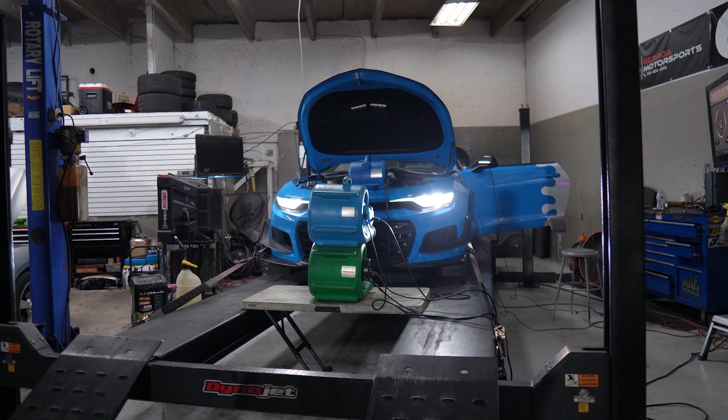Today we're going to be throwing in an aftermarket air filter to see if it actually increases horsepower. I'm getting retuned with a smaller pulley and E85, but before we do the dyno hits with that, I'll ask my tuner to do one dyno hit with just this changed out, to see if the aftermarket air filter actually increases horsepower. This vlog is going to include the entire dyno day, because I can't make a whole vlog about changing out my air filter.

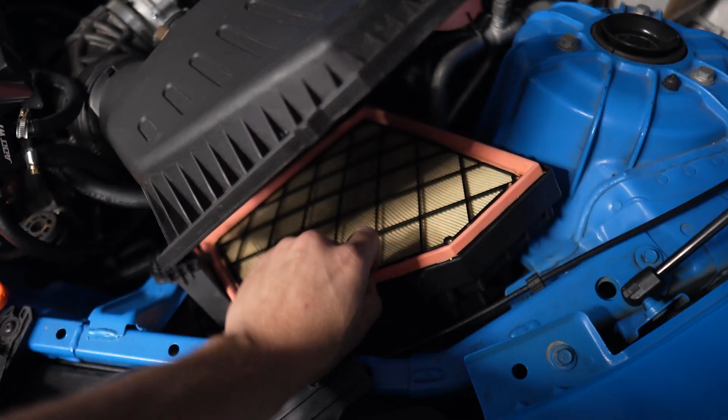Installing this air filter is going to be pretty straightforward. It's just a bunch of screws on the outside box, and the filter should be on the inside. I don't think I have to uninstall anything, so it's pretty easy. Alright, last screw here, then this should be able to just be yanked out. It's not dirty at all - this car is pretty much brand new. It's got 17,000 miles on it, 2022, so I didn't expect this thing to be nasty.

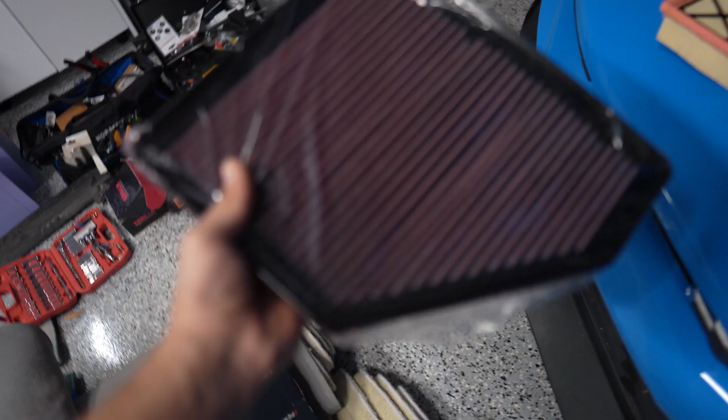So here's your comparison - this is the K&N. I suppose it's high flow because there's bigger area between each of the grates of the filter. I don't know, it could work like that. As you can see, this one is more condensed, not allowing that much air to go through. But we'll see on the dyno. The oil on this thing is actually disgusting, but I just mated it up, put it in exactly how the other one was, and we can close the box once again.

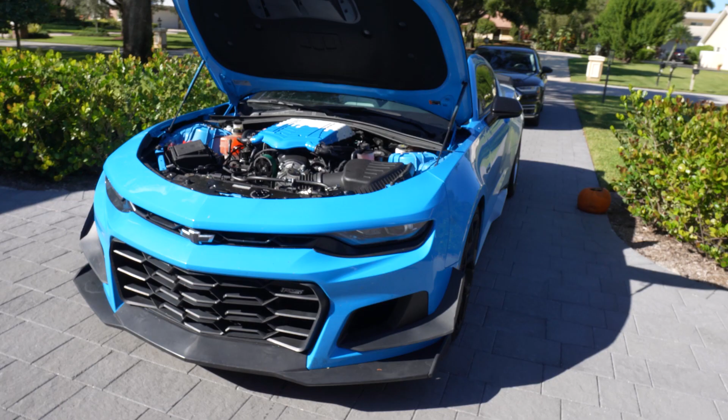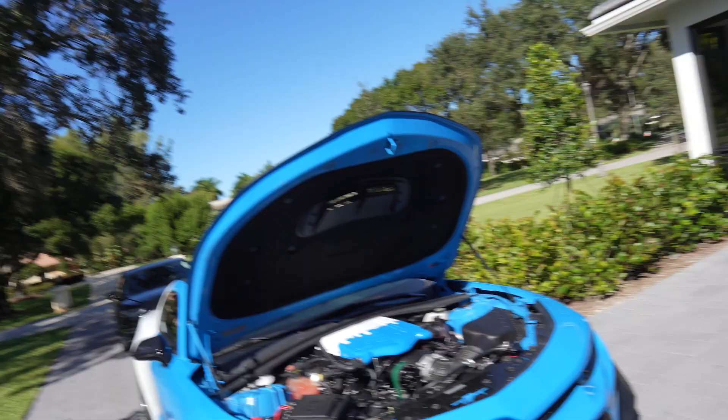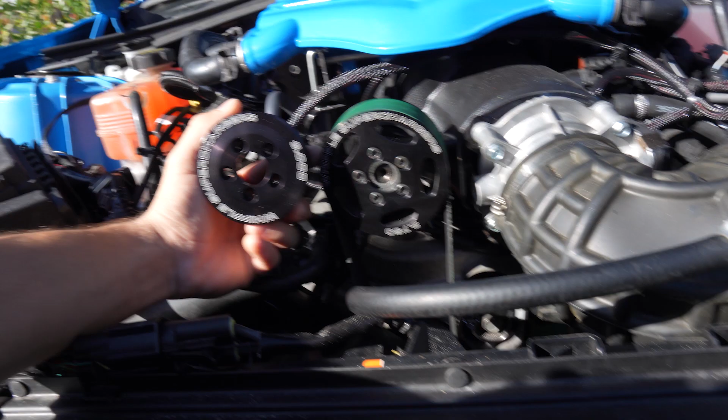Dyno day is tomorrow, so you all know what that means - we need to swap pulleys as soon as possible so I'm ready to make big power. This one right here is for 14 pounds of boost. It's a 3.0 Whipple pulley, and the install is going to be fairly simple. We just have to pop off the intake boot, mess with the belt tensioner. Hopefully I can reuse this belt and get this brand new pulley on, but you can see the size difference right here - this is 7 pounds of boost, and the smaller one is 14 pounds of boost.

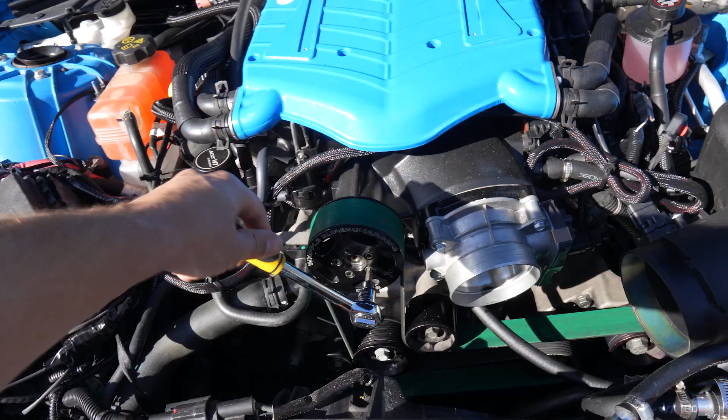This is like the easiest part of the install. Intake boot, just loosen the clamps. While that belt is still on there, we can break all these bolts off the pulley itself. I'm going to make sure not to miss any, because if I take that belt off this top pulley, it's going to be very difficult to break them off.

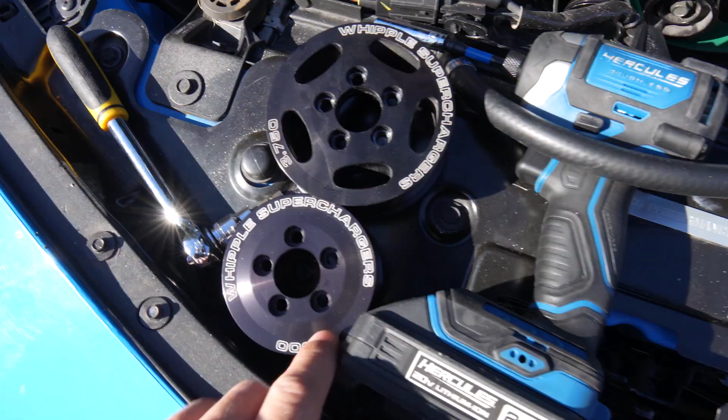So here is my 7-pound stock pulley that comes with the Whipple in the kit, and then here is the 3.0. This one makes 14 pounds, like I said before, but you can really see the size difference between the two. The smaller the pulley, basically the faster the blower spins and the more boost it creates. So that's what we're doing right here to increase boost. Sheesh boys, this thing's about to make some steam.

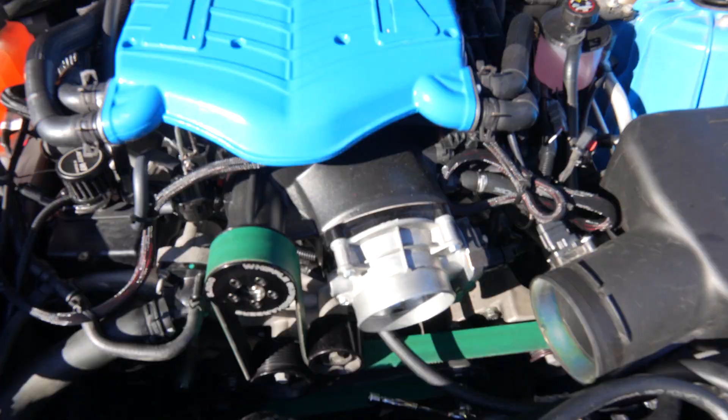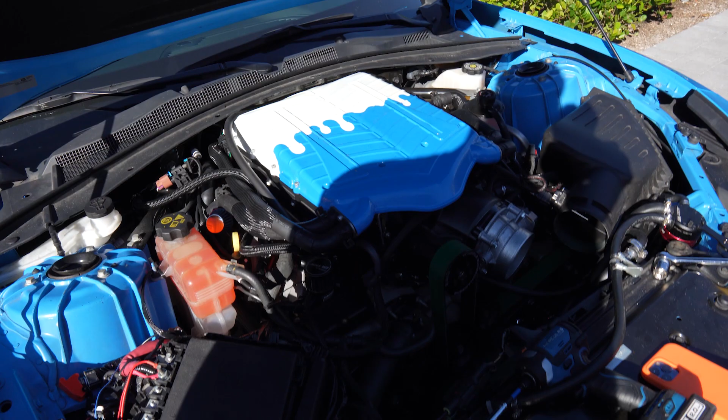I'll torque it down to spec once we have the belt on, because right now the pulley is just spinning freely. I was just messing with the tensioner and slid over the adjustable idler pulley like I showed in the previous YouTube video when I first installed this thing. The belt is a little bit too long, so I'm going to have to go buy a shorter belt. I'm not sure which belt this is, so I'll have to ask my friend with the 3.0 pulley which belt he runs. But this one's definitely too long because it's not tensioning properly - there's too much slack in it.

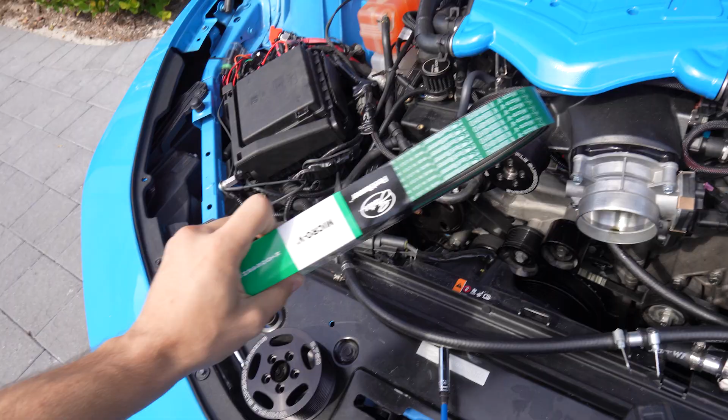The next day - oh, we are a little bit late because the belt didn't come until about 12 o'clock. But let's throw this thing on and get to the dyno so we can finally make big power in Sully. Let's go boys, we've got to get this going because I'm late.

So let's hurry up. I'm just going to do a quick little test start to make sure everything is 100% in order. Looks good to me. If it slips, it slips - we've got to get a smaller belt.

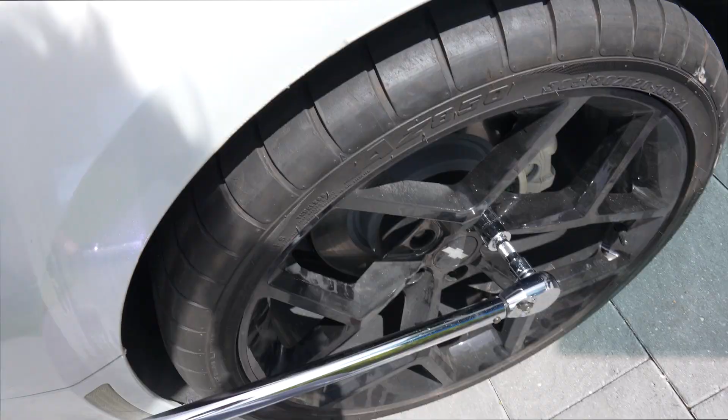I tried, boys, I tried. I already paid for this one. It's kind of crazy how that doesn't even fit. Oh - got it.

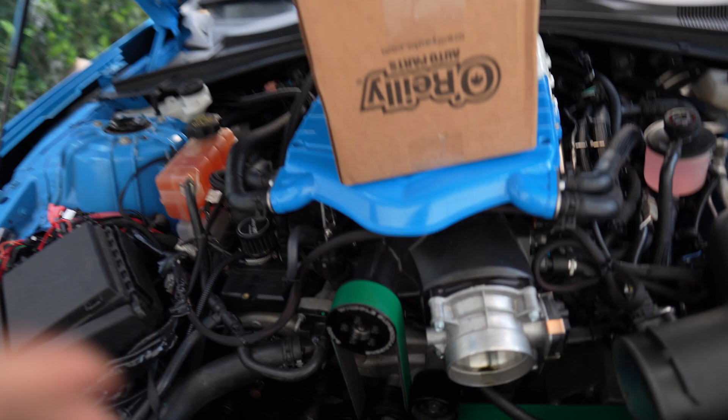I don't believe I ever updated the vlog - I actually didn't end up making the dyno day. The Zesty man is also back, he spawned out of nowhere. But I missed the dyno day because the belt came too late that morning. It was supposed to come at 7 a.m., it showed up at 12 p.m. My dyno appointment was for 11:30, and I had to reschedule.

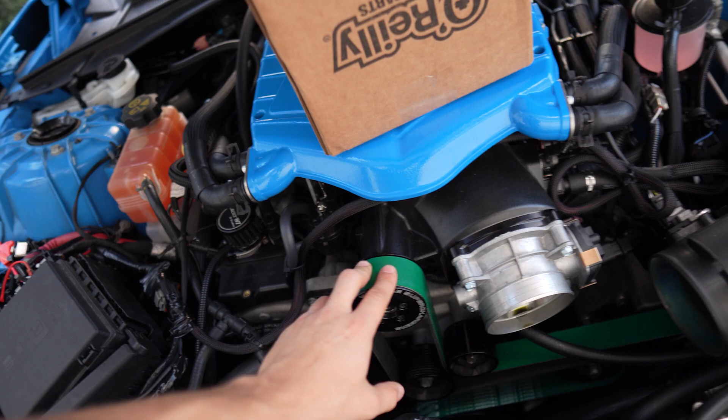And guess what - this belt, although shorter, ended up being too long, so I had to once again buy another belt, and I'm going to the dyno tomorrow.

So we're going to slap on this small belt and get ready for the dyno tomorrow morning. That way I can just pretty much turn the car on, head out there with the Zestiest, and see this car make some nice power.

But Big D, show us the difference between the two. So one is 2 inches shorter - that's the 822, that's the 848. This one is too long for the current pulley, this one is good. Throw it to me, let's get this thing on the car.

3, 2, 1, let's get a test start. Yes sir, we are all good here. Look at that, cha cha cha cha cha. It's ready for the dyno.

Good morning, everyone. So today is dyno day. Either it's gonna go fantastic and the car's gonna make big power, or something not so good will happen. We'll see. I'm hoping that the car makes big power and everything is smooth.

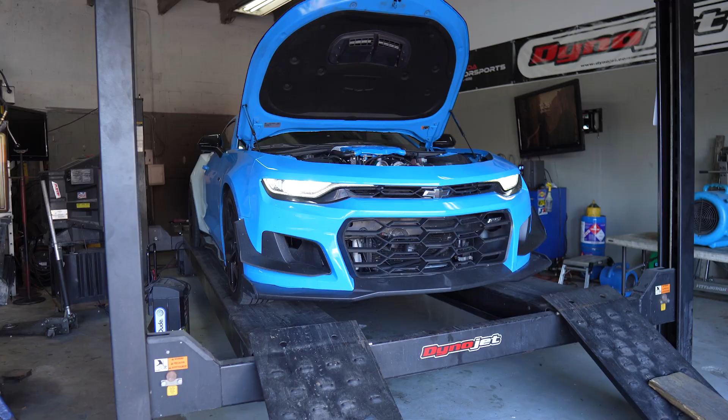What do you say? I think so also. Yeah, I hope so. That's what we should say. I don't think so. I hope so. Obviously, we just got here. We're loading it up on the dyno. So I think we're doing pump gas first, then the 85.

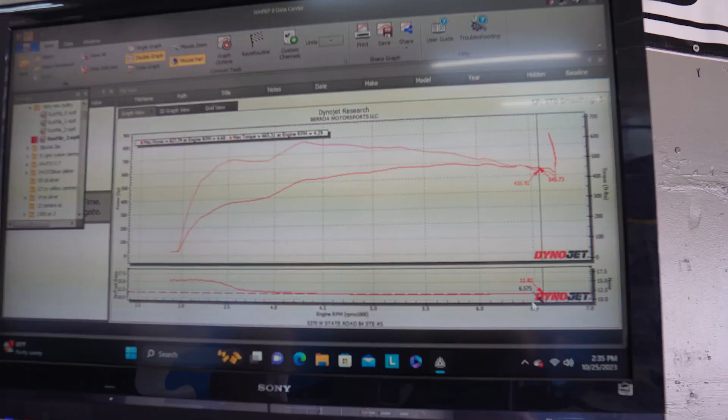That was just baseline with no timing in it, and that's a shift right there, so that's not accurate. But before that, we had like 6 something on 93. We haven't gone to E85 yet, so somewhere up there, right? Or is that peak power? Torque. That's torque. Yeah, so basically you're just dialing it right now.

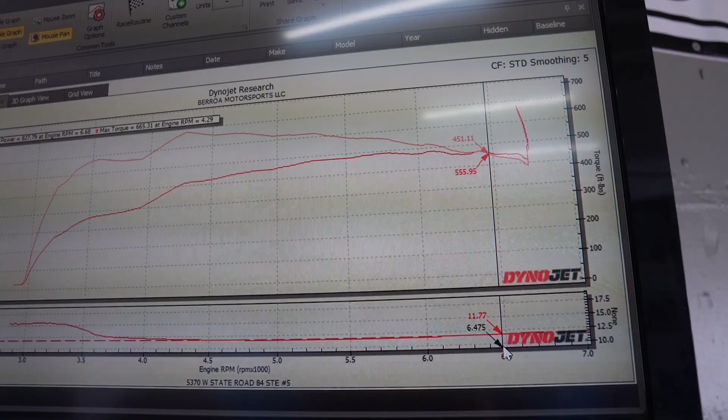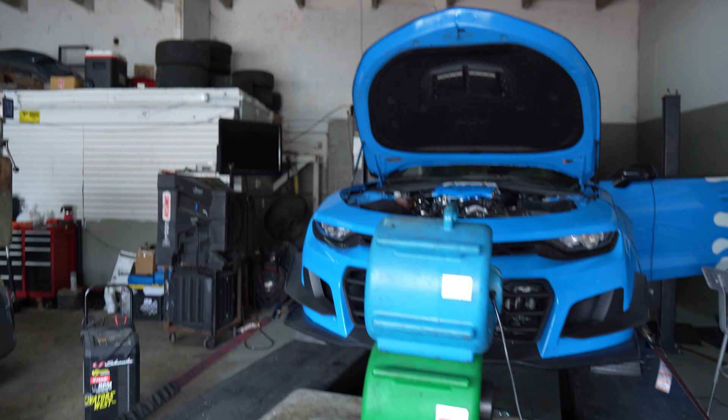It's not done with the 93 yet, and then we'll add the port injection and the 85. I think next we're actually going to get some bigger numbers out of this thing with more timing, because right now it has no timing in it. Now that the fueling's done, we can do hits with more timing and see what it makes on 93 octane. I think this is with a little bit more timing this time around.

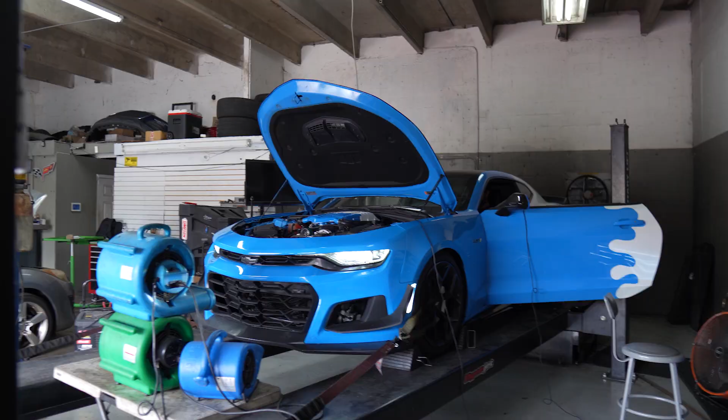We put belt conditioner on, we're gonna try again.

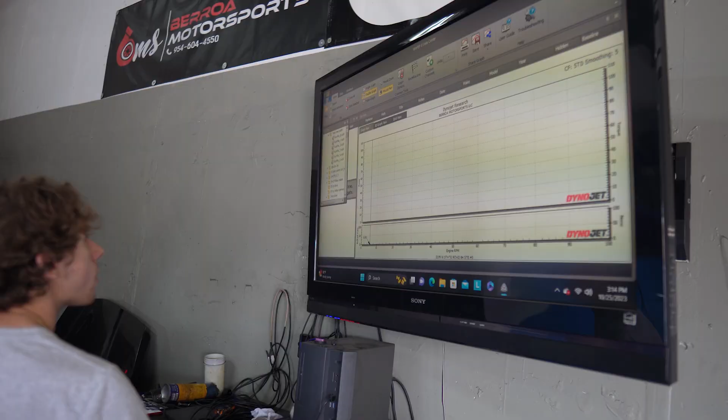Yeah, they need more power, right? They need more power.

So I want to update you all, because obviously it's been pretty loud inside of the dyno. Essentially, I had a little bit of belt slip there, so we put belt conditioner on there and adjusted the adjustable idler. It seems to have eliminated most of it, but it is still slipping just the slightest bit.

But at peak power, it made 12 pounds of boost on 93 octane and something like 650 wheel. And now we're switching to 85, but we got to make sure that the port injection is working first. So it's like a whole process of sitting here.

Already been here for 3 hours, and Devin is ready to strap it, tap it, and run. So the next thing that you guys are probably gonna see me do is empty out the gas tank so that we can put E85 in there and rip it on the dyno and hopefully get like 780 wheel.

What do you think? Let's get at least 800, which has never happened before. Yeah, I don't think that's gonna happen though. It'll probably make like 780. I'm calling it right now. 780, 790. We're all ready for 85.

I'm gonna grab it out of the trunk. Sorry about the wind noise, can't do anything about it. Dyno room is hot, got a lot of fans. But here it is, 2 gallons in that one or this one, 5 in there. Actually 5 in each.

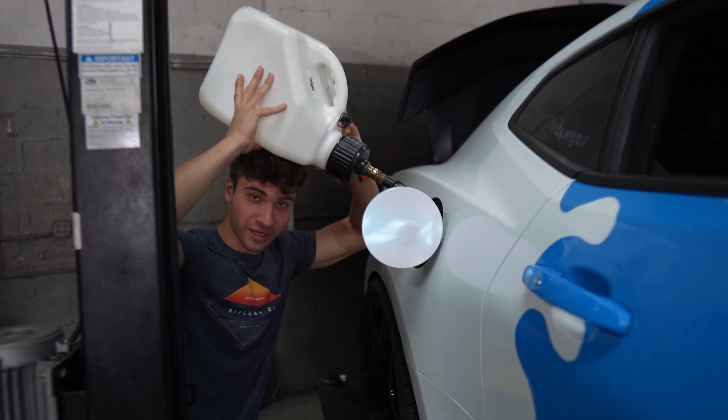So now we've got 85 going into the tank, about 5 gallons, and now we're gonna make the big boy power numbers. So I'm guessing like 740, 750-ish, a little bit less than Sally. Just because we have that big crank pulley on the bottom, or the small crank pulley, my bad.

The bigger the crank pulley, the more power you make, because you spin the blower faster. So my crank pulley is just the slightest bit too small, but we'll see what she makes on the 85 here in just a second.

And yeah, this is why I also have the flex fuel sensor, because I still have 93 in here, so we'll see. I actually need to go get more E85, because the E85 that I bought was not testing too good. It was E50, and he wants E68 or E70 at minimum, so we're gonna have to bump this up.

Holy, oh crap, holy crap. It gets a little swifty up top.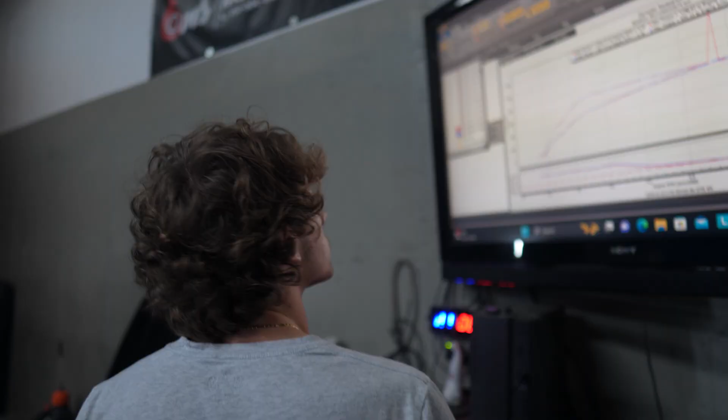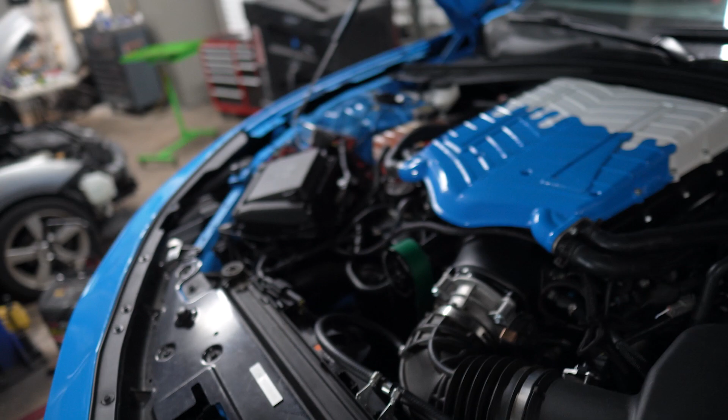That actually wasn't 12 pounds of boost, that was 10.6 pounds of boost out of the Whipple. I think it's because that lower pulley is just too small, so we're gonna pulley up on the lower one and probably make the 14 PSI that that pulley is supposed to make. And then this stock throttle body and the stock intake is actually taking out some power too. So he said another pound of boost could be freed up with this.

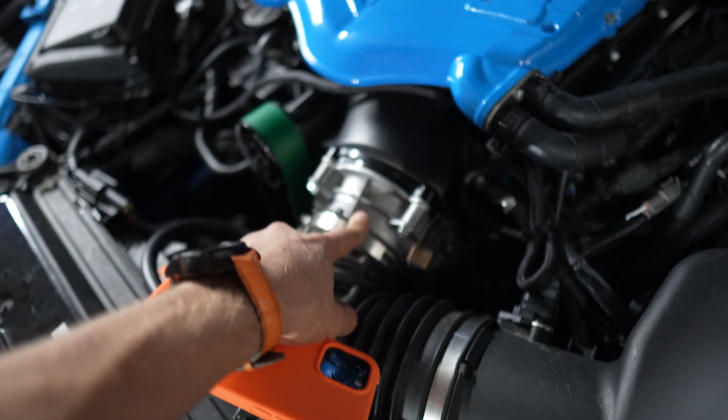Frickin' Devin, man. And that concludes our dyno day.

Overall, I gotta say that was a very successful dyno event or dyno day, because if you can make it all the way home after doing 20 dyno hits, then whatever you did to the car was a success, and obviously I'm very happy about that.

So I will pick it up once we put this thing back on the Dragy, and we'll do a separate video of testing the 60 to 130 times. I'm guessing around maybe 5.5 to 5.8 now that it's at 750 wheel horsepower on full E85.